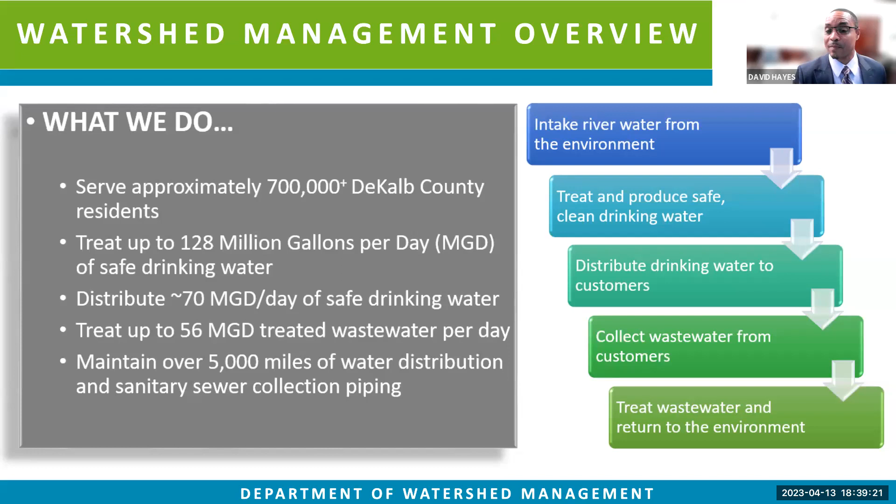Next slide, please. So the DeKalb County Watershed Management Engineering and Construction Management Division, what are we doing here this evening? The Engineering Construction Management Division will lead us in this project. What has happened is the pipe in the ground inside of DeKalb County is aged pipe. A great deal of it has reached its end of life expectancy. Some pipes have flaws and defects from the manufacturer that didn't allow them to last as long as designed, which is causing a great problem.

We have a huge amount of water main breaks throughout DeKalb County, and those breaks make it very inconvenient for residents. It wastes precious water resources, and it could cause health issues if we allow contaminants to get into our system. So what are we going to do here today?

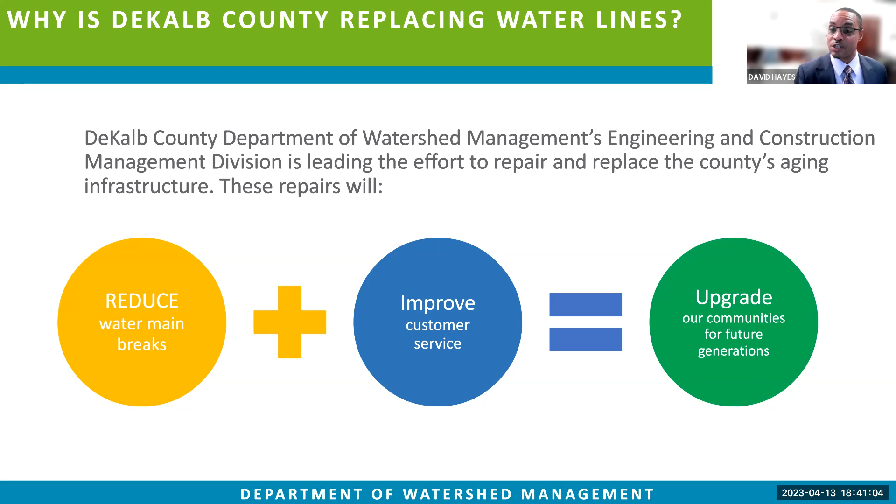We're going to try to reduce these water main breaks. When we reduce these water main breaks, that helps improve our customer service and build reliability in our system. With reduced breaks, greater reliability, and great customer service, what that yields is a robust system that will allow future growth for DeKalb County. Our goal is to improve DeKalb County's infrastructure so that we can continue to be leaders within the state of Georgia. Next slide, please.

Garney is going to be our boots on the ground, putting that pipe in the ground for us. And then we have project managers, Tetra Tech, Prime Engineering, and AECOM. They help design, they're going to help ensure that the pipe gets in the ground properly, and they're going to help us collect this data to understand what pipe has been updated and the conditions of the pipe.

So with this team, we are hoping to get this pipe in the ground on time, on budget, with very few issues. We know it's going to be a little inconveniencing for some of the people in the area, but with this team, we're going to minimize those inconveniences and improve the infrastructure that will allow DeKalb County to continue to be leaders.

Next slide, please. The next person you're going to hear from is Ms. Cassandra Marshall. Ms. Marshall is our Assistant Director of our Capital Improvement Project program. She's going to tell you a little bit more about the problem and then tell you what we're doing to resolve this problem. Ms. Marshall.

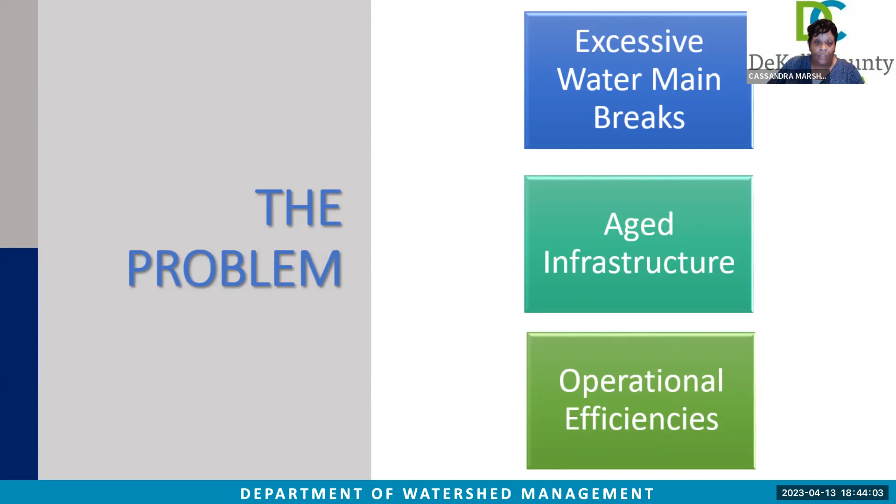Next slide. So the county has over 3,000 miles of water distribution pipe in the system and provides drinking water to the ratepayers. We have 4 pressure zones, 21 water storage facilities, 16 pumping stations, and 6 pressure regulating stations. As you can see, this is a large system to maintain. Most of the system is aged and cannot be repaired or replaced all at once. Therefore, the county had to develop a best practice way to evaluate and prioritize how and when the piping will be replaced.

The first objective was to model the system. In 2019, the county developed its first hydraulic model. A hydraulic water model is a computer simulation of the water system. The model can provide a big picture look at how the system should be functioning. For example, it details such as system pressures, available water pressures at fire hydrants, and how the tank levels affect the system.

To develop the model, we use the county GIS data, meter data of water usage from the billing system, facilities data such as the water storage facilities and regulated stations. Field testing was conducted to validate the data, and then the model was calibrated. This data was ultimately used to develop the county master plan and to prioritize projects. Next slide.

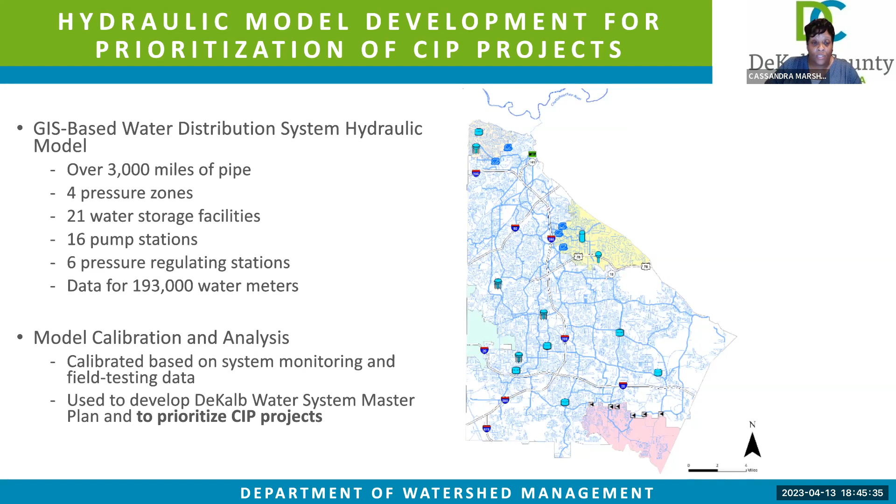So I will now speak about the solution and the execution of the CIP project. So what does CIP stand for? Well, CIP, or a capital improvement project, is a project that helps maintain or improve an asset. It can either be new construction, an expansion, renovation, or replacement of an existing infrastructure. This project is the replacement of an existing old steel water main pipe.

In 2021, the Board of Commissioners approved a CIP program for $2.4 billion for projects to be completed from 2021 to 2030. The Scott Boulevard Phase 3 water main replacement project is a $20 million project within that plan. My team, the CIP team, is responsible for getting that work done. My team includes 4 DWM construction managers and 12 licensed inspectors.

Later in the presentation, you will also hear from the DWM construction project manager, Mr. Edgardo Amasquita, who has 20 years plus of construction management experience and is a licensed water professional. Along with in-house staff, we are also supported by consulting firms who help assist the county with construction management and inspection services. So what we want you to know is we're here to help.

We want to reduce or eliminate emergency repairs. We want to stop breaks. We want to protect the environment. And finally, after the project is completed, we want to improve sustainability to the system. These improvements should last a minimum of 100+ years. Next slide.

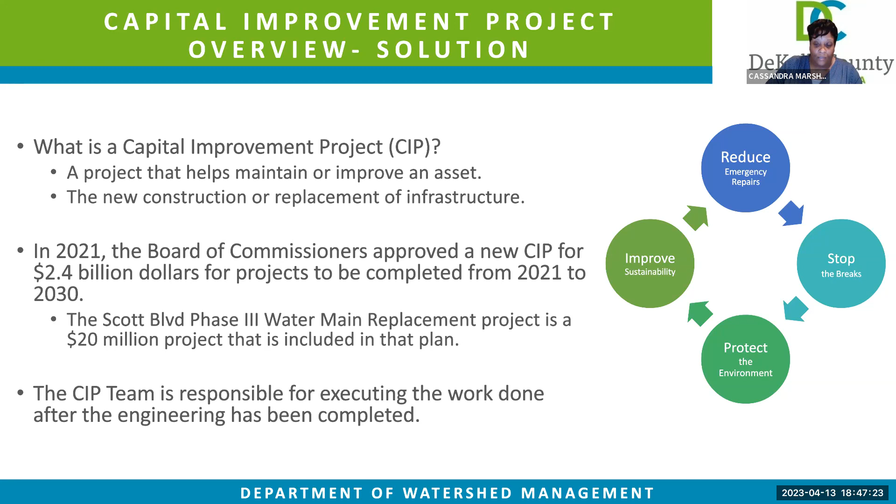You will now hear from Mr. Pavel Vayner, the principal engineer for the project, about the scope and the overview.

Good afternoon, good evening. My name is Pavel Vayner, and I'm principal engineer and engineering project manager on this project. I have 37 years of experience in design, construction, and maintenance of water and wastewater infrastructure.

What planned work does this project include? Installation of about 9,000 linear feet of 30-inch ductile iron pipe, mainly inside the right-of-way under the existing pavement, as well as 6-inch, 8-inch, 12-inch, and 16-inch water mains. The existing street will be milled and resurfaced when the water main installation is complete. The existing 30-inch steel pipe will be abandoned in place and filled with non-shrink grout.

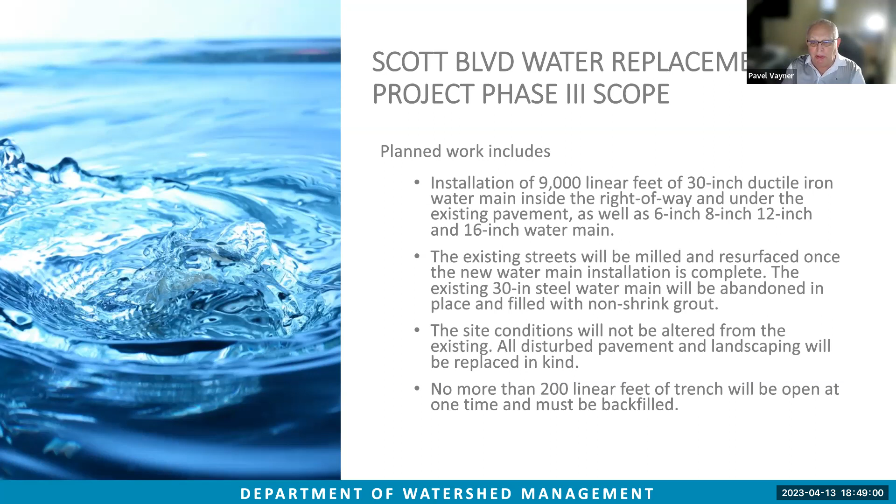Site conditions will not be altered from the existing. All disturbed pavement and landscaping will be replaced in kind. No more than 200 feet of trench will be open at one time and must be backfilled daily.

There will be about 300 to 400 residents impacted by the project. The project area is located in DeKalb County along the following streets: Maple Street, East College Avenue, Brown Place, Livingston Place, Craigie Avenue, Forest Boulevard, North Carter Road, Chester Way, Russel Drive, and South Columbia Drive.

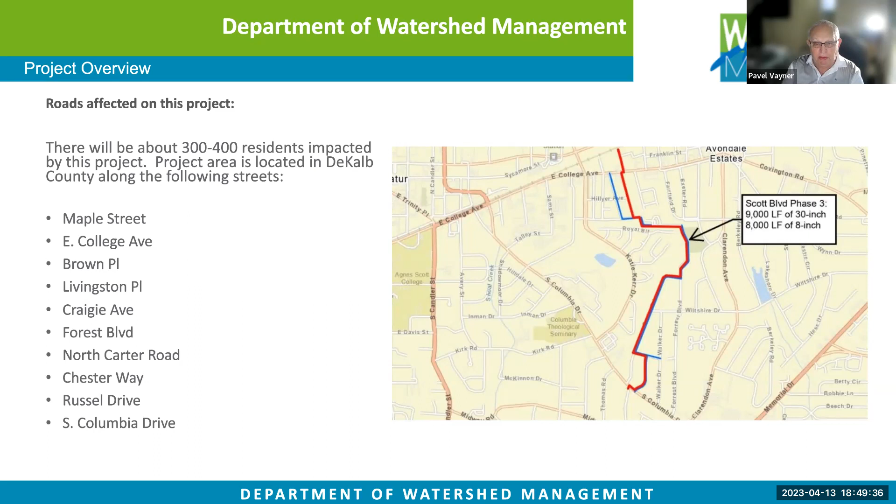And now I want to introduce our construction project manager, Edgardo Amasquita. Good evening, everyone. My name is Edgardo Amasquita, and I will be responsible for the field work happening on this project. I will work closely with the contractor and engineers to bring this project in on time and on budget. I will also have a staff of inspectors in the field on a daily basis, reporting up the chain of command.

A little bit about me: I have 27 years experience in construction management, especially working with infrastructure work.

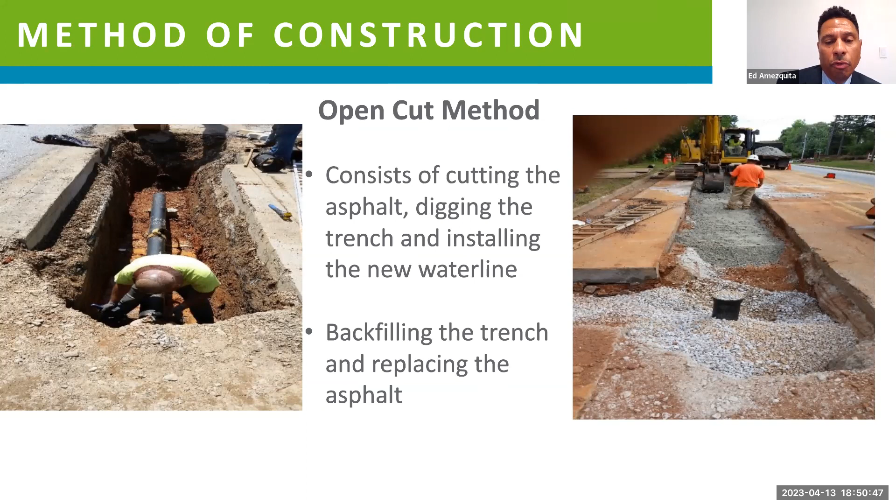The main method of construction will be open cut. Open cut basically means that we will cut the asphalt, dig our trench, install the new water line, then backfill the trench and replace the asphalt.

Regarding community notices: a community notice will be sent out May 15th. That'll be probably the first notice sent out, giving basic information about the project, time durations, and so forth. Then we will prepare for mobilization around May 30th.

That's when you'll actually start seeing contractors bringing equipment. You'll start seeing construction workers become more visible. The construction start date will be June 5th. This is hardcore work - we'll be digging, we'll be cutting trenches. That's where the construction really gets going.

Final restoration, which includes paving and restoration of grass and those sort of things, will be March 1st, 2024. We will try to end the project construction end date March 31st, 2024. That will consist of punch list items, and at that point we will ensure everything is replaced and put back the way we found it. If there are any issues, we try to take care of all that before we close out the project.

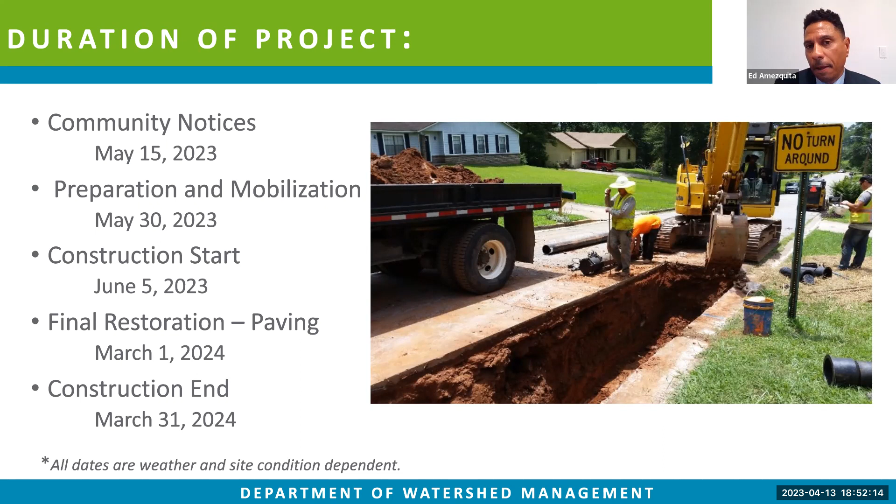My responsibility and the team's responsibility in the field will be to ensure erosion control and sediment controls are in place. We ensure proper installation of the new water line. We take communication with residents very seriously. We ensure traffic control is maintained, and above all, we ensure safety measures are followed - not only for the construction workers, but for residents and anybody in the vicinity of this project.

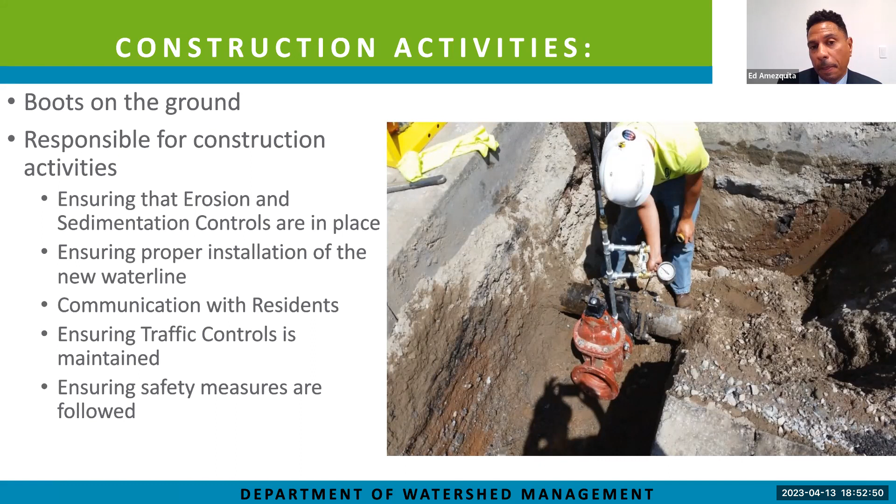Here is an overview of what you'll see: trenches being cut, filled, and worked on, and then we'll come in and lay our asphalt down. Thank you. And now Ms. Marshall will finish the presentation.

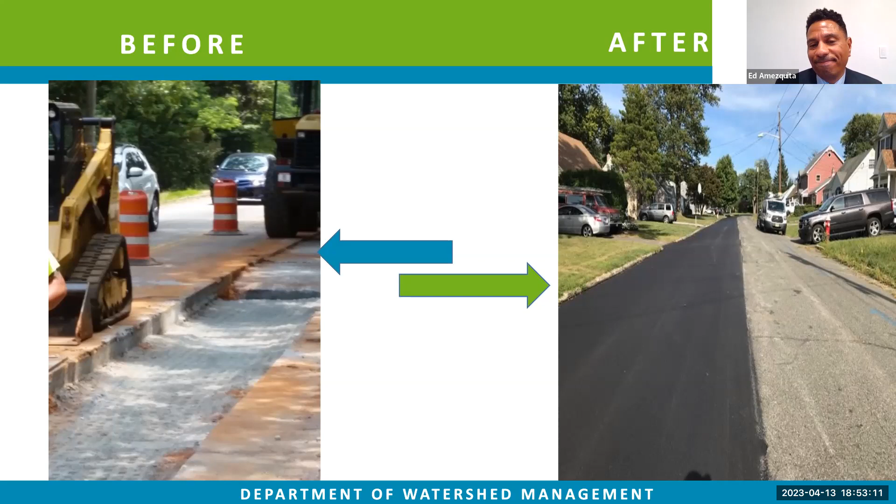Thank you, Edgardo. At this time, I will now talk about community concerns and what you should be aware of.

What comes with construction are inconveniences; however, we do want to try to minimize those inconveniences. What you're going to see is a lot of construction traffic, foot and vehicles, large dump trucks, and heavy equipment. There will be construction workers, county employees, and contracted workers throughout your community. There will be material and equipment deliveries by means of large tractor trailers. However, there will be crews and flaggers that will guide these large vehicles in and out of the area.

Work zones will be delineated by orange cones or barrels. Also, as a security measure, all county contractors and county employees will have identification badges issued by the county, as well as marked vehicles - either with a company logo, or they must have a generic DeKalb County contractor sign. There will be increased noise from the equipment backup alarms.

There'll be heavy equipment usage, saw cutting of the asphalt, and most importantly, traffic delays due to lane closures. Our typical work hours are from 7 a.m. to 7 p.m., Monday through Friday, and sometimes weekends. However, lane closures will only occur from 9 to 4 p.m. All property owners will have access to their driveways during construction, and notifications will be distributed prior to any water service disruption. You may also see silt or dust on the street, which could be tracked by equipment. However, the contractor is responsible for keeping the streets clean and swept daily.

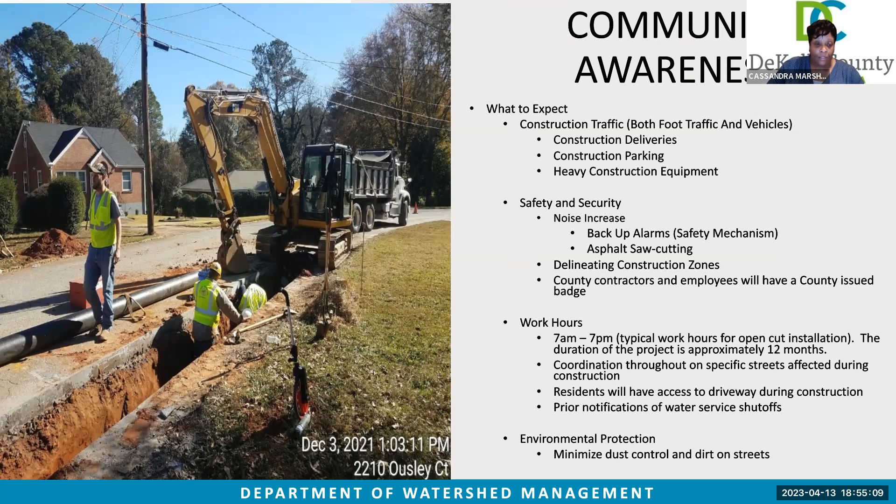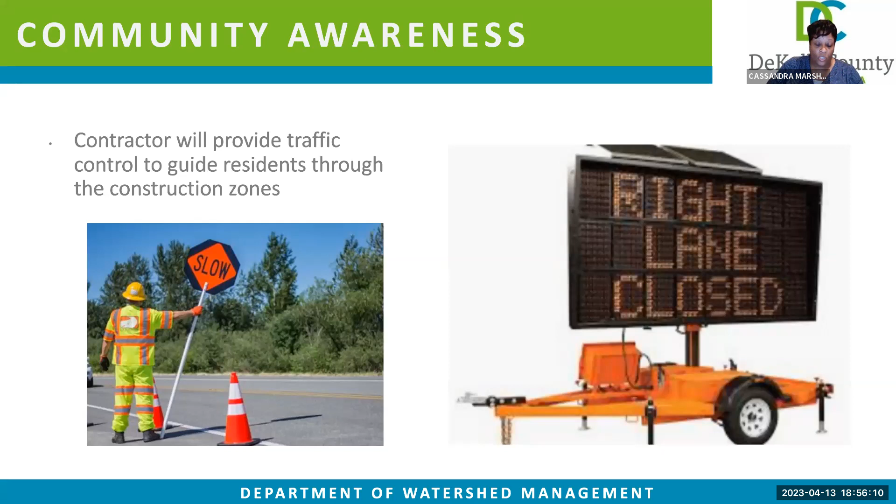The contractor will provide traffic control to guide residents throughout the construction area. The photo to the right is a message board, which will be one of the primary traffic devices utilized on DeKalb Industrial Way for lane closures. In addition, prior to starting construction, message boards will be installed to alert the community that the actual construction has begun.

Next, you will hear from the communications outreach specialist, Ms. Sanice Latson.

Good evening, everyone. My name is Sanice Latson, and I'm the CIP Public Outreach Specialist responsible for communications and outreach on this project. Tonight, I will share with you the methods DWM will utilize to communicate with you about this project. But before I do that, I want to briefly recap what has occurred so far within the community.

We will also use GovDelivery and e-blast notification service to communicate with you. If you have not done so already, please take a moment to provide your email address in the chat so that we can capture that information for future use.